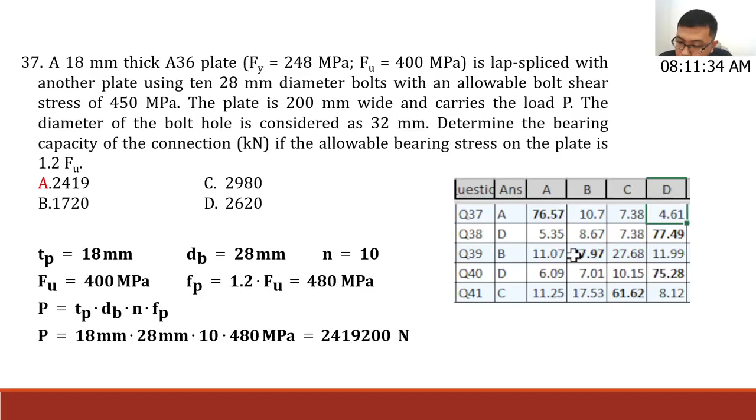Actually yung stats natin dito for the online module, if you're going to consider structural, talaga namang nag-improve. Kasi pag i-compare natin siya with what we had for this same set of questions, although iba yung given, no? So face-to-face exam, same questions, iba yung given doon, napakababa ng stats when we had that discussion, when we had that first exam for the face-to-face students. Napakababa talaga, like there's only one or two questions na may 60% above for this same set of questions. So ayan, with the practice talaga, and of course repetition, we could definitely improve our outcomes or our performance now, as what we can see here with our statistics. That's good to know, guys.

Number 38. So that's our answer there, 2419.2 kilonewtons. Okay, one moment guys, let me make some changes here.

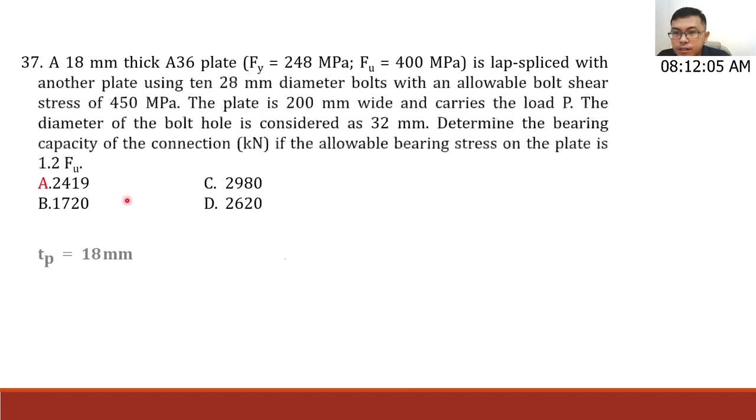Okay, so let's now consider number 38. Ito naman yung ating komento dito.

Okay, determine the balance steel ratio of a beam with beta equals 0.835. FC is equal to 30.5 and Fy equals 415 megapascal. So this is our given: Beta 0.835, FC is 30.5 megapascal and Fy is 415. Our formula for rho balanced is 0.85 FC beta 600 over Fy, times 600 plus Fy. So the answer there is 0.031 once you substitute everything.

Just substitute the given values. So the answer is 0.031. Okay, so we have no issue there.

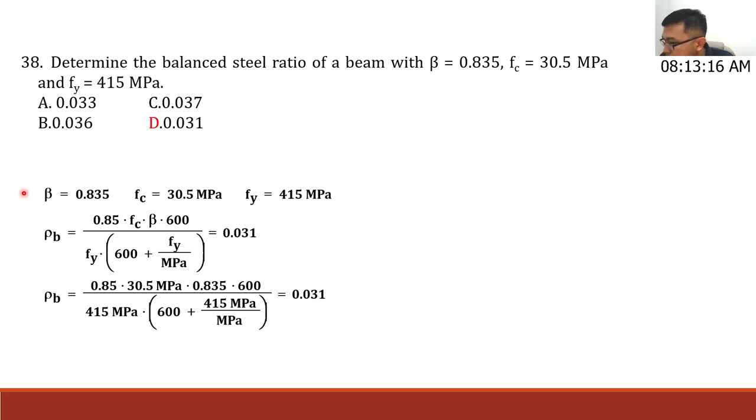That's pretty straightforward, so I'm hoping that the stats would also show the same. Let's see, number 38, we have 77.49%. Wow, that's a really good outcome for the stats as well. Although these are partial stats pa lang, guys, as what Engineer Diego Gilisania informed us. We needed to prepare for the class for today, so the partial stats of the online exam were given ahead, so we could assess the statistics.

Ayan, dito sa comment section may nagtatanong, ano daw ma-advise na matulog ng 2 tapos 4:30 AM gising. Ayan, 2.5 hours lang yung tulog, no?

Wow, napakasipag ng kaklase nyo. It's actually depending talaga sa effort, depending on the effort. And of course, pag alam natin na medyo behind tayo for a certain subject, it would be up to us to make adjustments and be able to spend more time on the problems, problem solving, or practicing. So nasa inyo na yan.

Although, one word of caution din naman for those who choose to spend their sleeping hours as study hours, I think we should not do it every day. Perhaps you could do that for some other days, but not every day, kasi ma-sacrifice din yung rest, which is very important for you. Kasi pag magkasakit tayo during the time of the review, especially approaching the board exams, yung trade-off niyan, you spend more time studying pero nagkasakit ka naman. So that would be something we wouldn't like to happen to us, especially approaching na ang board exams.

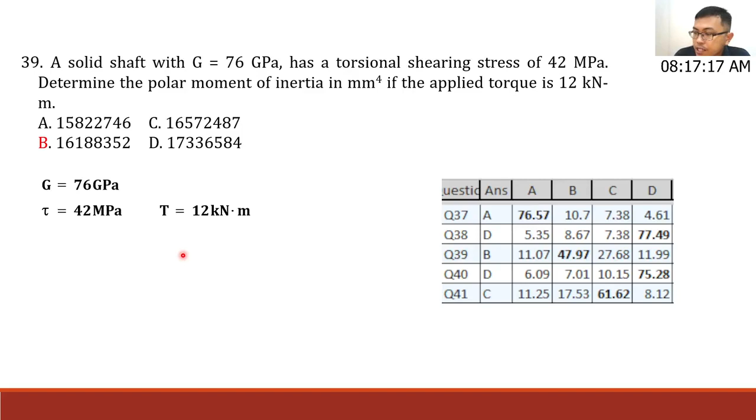May adjustments tayo dito sa the way this is solved. For those of you who have attended face-to-face, please take note of the adjustment that we made here. This formula that you see here is from the base formula natin sa torsional shearing stress, which was TR over J. Once again, please take note of the adjustment. Although if you follow the solution that we had during the face-to-face exam, that would be the way to get a value found in the choices.

However, please take note of what we just did here. So in our solution, our radius is actually in terms of the diameter. So tau is equal to T times 0.5D over pi over 32 D to the fourth.

So, if you notice this one, if we simplify that, this would actually bring you to the torsional shearing stress formula for solid circular shafts. So that was 16T over pi d cubed. It's actually 16T over pi d cubed.

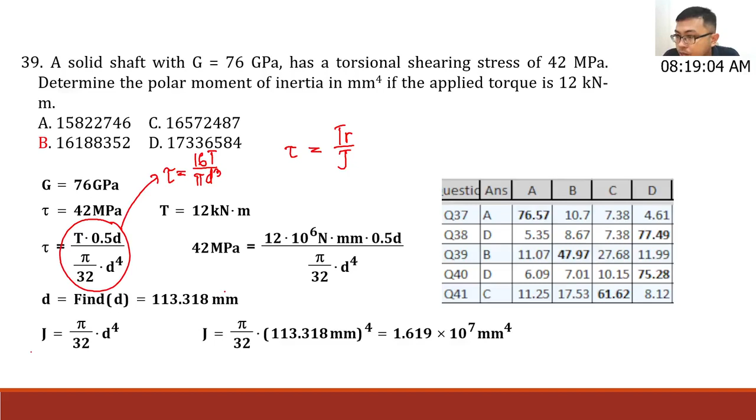Now, if you're going to do that here, substitute the value for the torque and the shear stress, so you could solve for the diameter. You could solve for the diameter. And this diameter is 113.32, which could then be used to solve for the polar moment of inertia, pi over 32 d to the 4th. And that would give us 1.619 times 10 to the 7, or letter B in our choices.

I hope that made sense to you. So the difference here compared to face-to-face is that the radius seems to become constant there, right? It's not dependent on the diameter anymore. So this is a more accurate way to solve the problem. A more accurate way to solve the problem. Because our radius here should be dependent on the diameter, as well as the polar moment of inertia, which is the unknown value in our problem.

So the solution here shows we have J equals letter B, 16188352. Now, take note of the formula for the polar moment of inertia, pi over 32 d to the fourth. That's the polar moment of inertia. The statical moment of inertia, that's pi over 64 d to the fourth. But for polar moment of inertia, that's pi over 32 d to the fourth.

What do our stats show here? Number 39 for us. So that is 47.97% got the correct answer. Alright, so let's have the next one. No questions on this particular question?

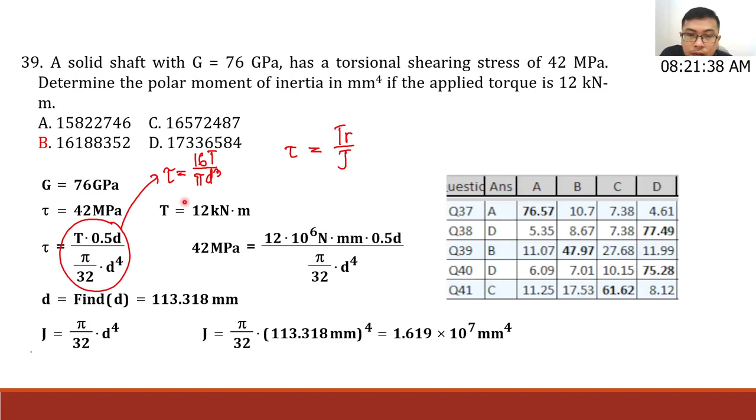Our stats here show that number 40, 75.28% got the correct answer.

Just to recall, although I didn't show it here, what is the derivation? How was BH squared over 4 derived? Let me just write it here. How was BH squared over 4 derived? So this is our cross-section.

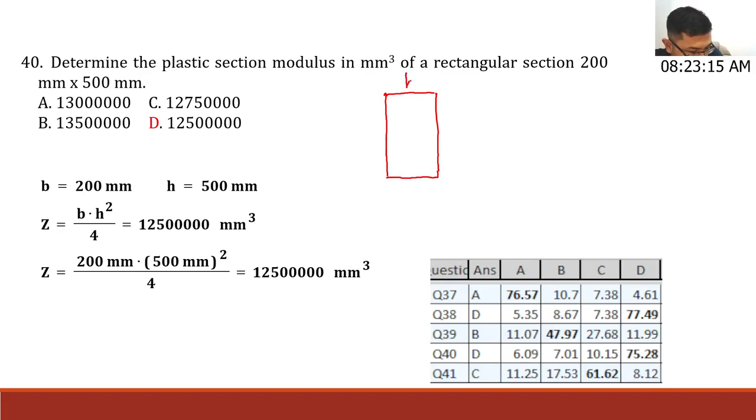This is our width, and this is our total depth H. This is what we call the plastic neutral axis. Now, what is the significance of the plastic neutral axis? The plastic neutral axis divides our section into two equal areas, two equal areas. So it's different from the elastic neutral axis. Where do we see the elastic neutral axis? That's in bending stress — bending stress of sections. For example, you have a bending stress distribution like this. The elastic neutral axis corresponds to where bending stress equals 0. That's elastic. While for the plastic neutral axis, the main principle is that it divides the area into two equal areas.

Now, how do we solve for our plastic section modulus? The plastic section modulus is the summation of the statical moments of area for both the compression and tension sides of our section. Because the stress distribution here is not like this — this is elastic.

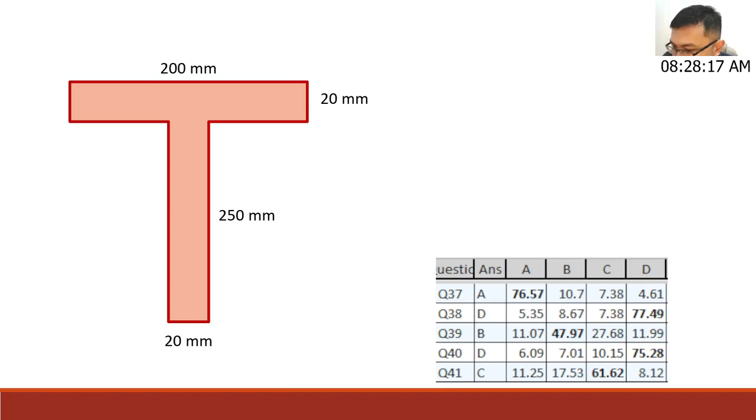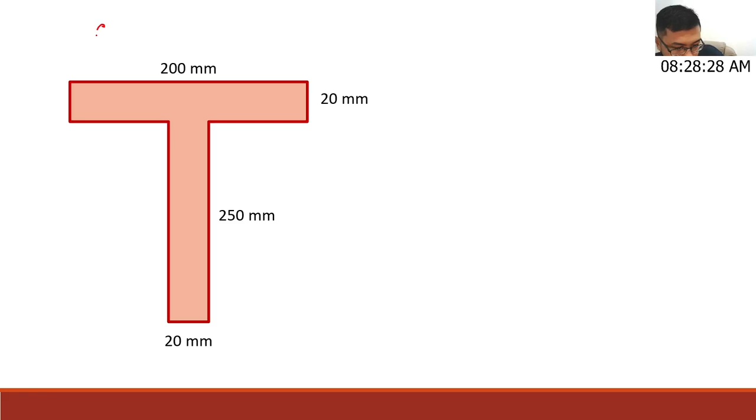Okay, so practice ta kadali, no? Practice ta gamay, guys. For our next slide, practice tayo nito. Practice. Okay, practice, guys. Compute ZX. Ito yung ating i-compute dyan, ha? Compute for the plastic section modulus with respect or along, no, with respect to the x-axis, ZX.

Sige, based on the principle that we just discussed. Principle is summation AY, summation AY, no, for both tension and compression areas. I would like you to spend a few minutes, no, and try to compute. Use your calculators there to compute for the value of ZX. And then after that, I will show you the solution as well here on our slide. Sige, kaya magsulat ko sa solution dire sa MathCAD, guys, ha? You can try it on your own first, and please let me know kung ano yung nakuha ninyong sagot.

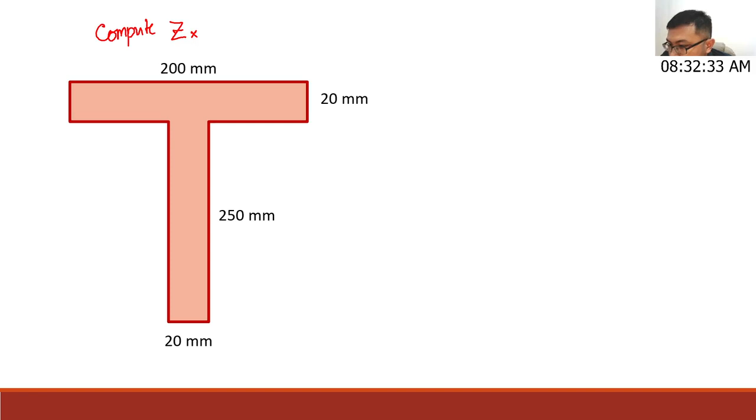Alright. Kung hindi nyo nakuha, no problem at all, no? Huwag mag-alala kasi ipapakita natin dito yung sa ating solution for the problem. Okay, sige, so I will now show you the solution to this problem, guys.

Okay, medyo maliit lang yung font dito, so let me just adjust. So gawin kong 150. Ayan.

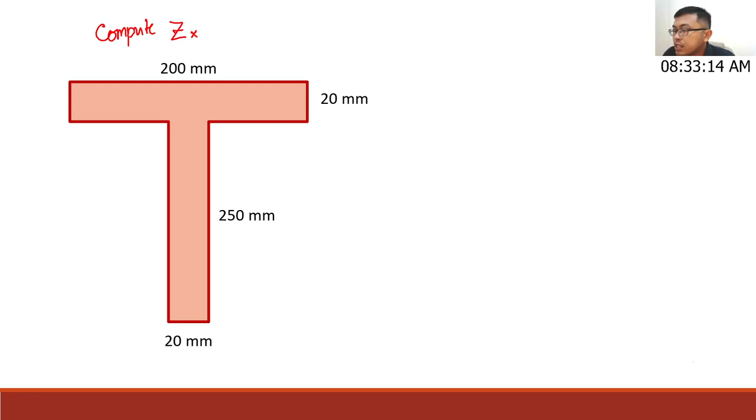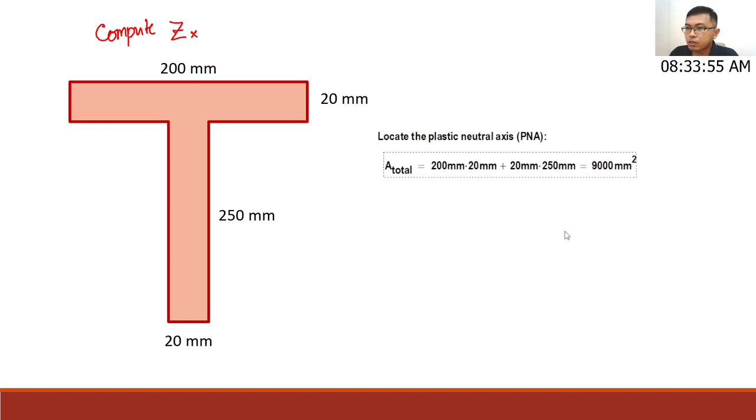Okay, sige, so basically yung first step talaga natin, okay, our first step is to locate the plastic neutral axis, also known as the PNA. Now i-locate nato siya ang location or locate the plastic neutral axis PNA. Okay, so ano yung principle when we say plastic neutral axis? It divides our section into two equal areas. Ano ba yung total area ng section na to? Ito yon, ito yung total area. So that is the area of the top flange, that's 200 by 20. Tapos yung area ng web part, no, 20 by 250. So yung total area natin is 9,000 mm squared, okay, if you're going to calculate that.

Okay, now i-locate natin yung position ng plastic neutral axis. There are two possibilities that we have to determine or we have to consider. Yung unang possibility, guys, is for the neutral axis to be located within the flange. Posible na siya, no, posible na siya, dire siya dapita, no, mana i-verify ni siya or we have to determine. Okay, and the second possibility is for the neutral axis to be located within the web area. Ano siya?

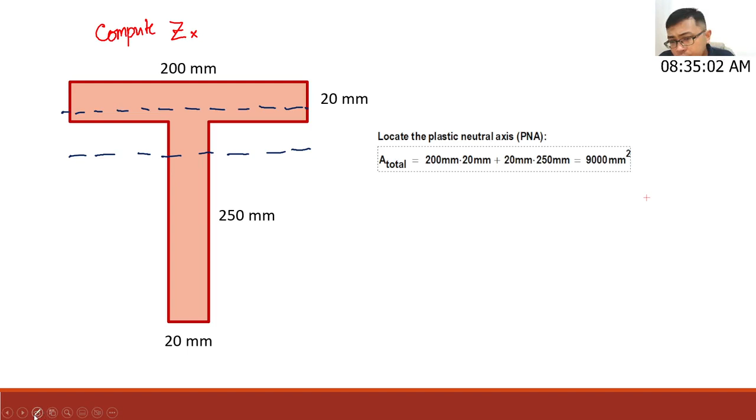Now, is this okay? We have to determine that, and for us to do so, here's what we do. Let's solve first the total area of the flange. Up here, what is the total area of the flange part? This one. So the total area of the flange part is, excuse me.

Okay, 4,000 mm squared, that's 200 by 20 mm. What is the half area of the total? The half area of the total is, how much is it? 4,500. Okay, 4,500.

So this means that the area of the flange is not enough. It's lacking to attain the half area requirement, which is 4,500. So, because the area of the flange is less than the half area, the plastic neutral axis is located below the flange. In other words, if it's below the flange, this means it's within the web area.

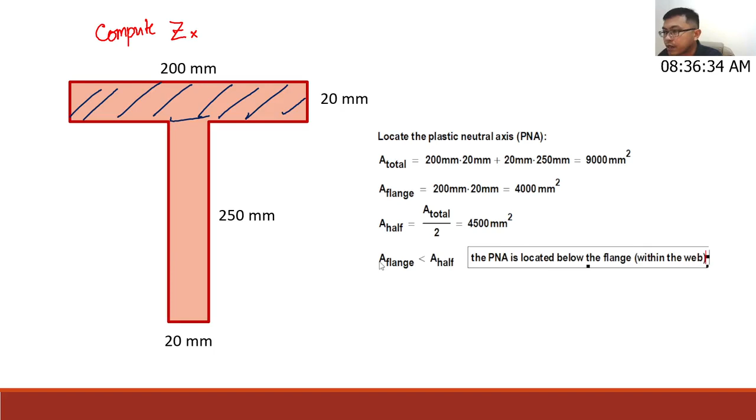Okay, so let's now determine what that distance would be. This is our y distance going to the plastic neutral axis. Let's call this distance y. So this is now our plastic neutral axis, which we have determined by calculation to be in the web area.

So to determine that, we're going to get the remaining area required to reach the half requirement. So that would be the remaining area required, equal to the half area minus the area of the flange. That would be in mm squared too. That's 4,500 minus 4,000. So, A remaining is equal to 4,500 mm squared minus 4,000 mm squared.

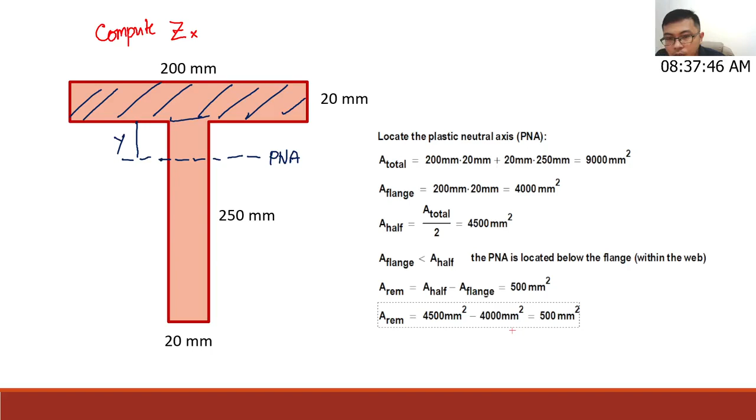And since we're now in the web area, our thickness there is 20. So our y is A remaining divided by the thickness of 20. So that is 500 mm squared divided by 20 mm. So that would be 25 mm. So this location here is actually 25 mm.

25 mm, 25 mm below the flange, 25 mm below the flange. So if you're going to determine this length down below, here it is: this is 250 minus 25, so this is now 225 mm.

Okay, good. So let's now determine our z. So what is z? Zx is equal to the statical moment of area of all the areas above. Okay, so let's call this area 1.

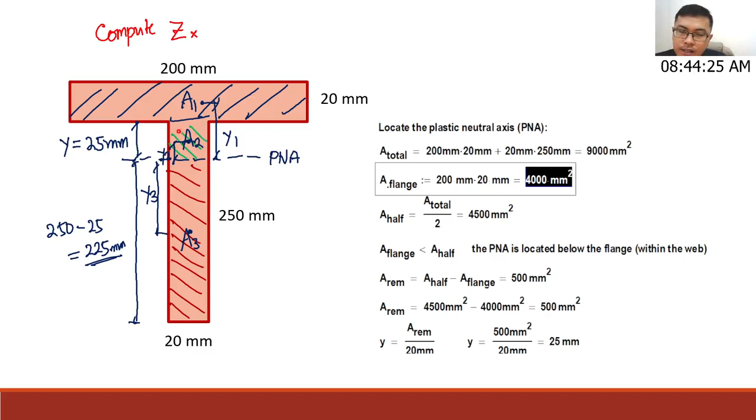Okay, so kailangan, how much area do we need here para makompleto natin yung kalahati? So ito yung ginamit ko. Parang ano lang ba? 4,500 minus 4,000. So yung half area natin na kailangan ma-achieve minus the area ng flange na 4,000. So kailangan kukuha tayo ng 500 square mm dito sa baba.

Now, the area that we need to get there, area remaining, is equal to the y distance that we would want to solve times the thickness of that web area at 20mm. So to solve for the area remaining, the y, para makompleto natin yung half area, it's 500 and then divide by the thickness of the web which is 20mm. Kaya nakuha natin yung 25. Okay? Yan.

O, solve for y ka na. Pwede na siya, no? Shift solve for y na lang. Basta kalahati ng area, no? Kalahati ng area. Pwede ka rin dito sa baba. You can actually set it by considering the reference axis dito sa lower part ng ating web, no?

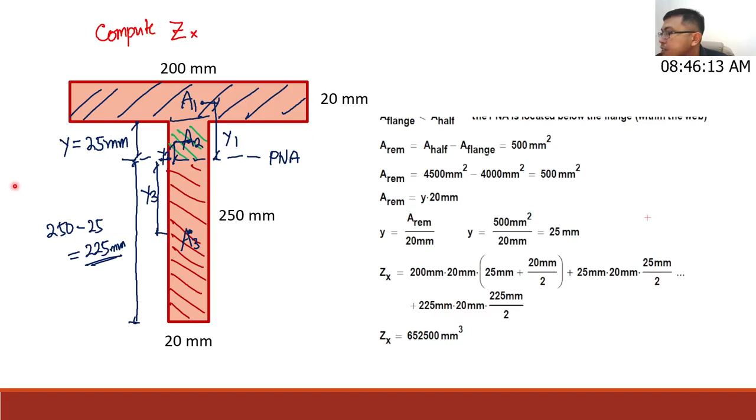Okay, so thanks guys, no, for helping sa natin, clarification. Okay na Tane? Are we good with this?

This is just additional, no? Additional lang to na topic for discussion natin kasi pwede din naman na bigyan tayo ng medyo complicated na result, no? I mean, complicated na shape. Not necessarily complicated na hindi natin siya masolve, pero complicated in such a way na hindi siya direct formula. Hindi siya BH squared over 4, no? Hindi siya... ano nga yan sa triangular BH squared over 6 ba? No? Ata. So hindi siya ganon.

So we need to know the basic principle, para kahit anong shape pa yan, masolve natin. Okay? Sir, pwede ni mode 3 to pareha sa pagkuha sa moment of inertia nga location of centroid? Moment of inertia nga location of centroid. Yes, I think you can. I think it can be done.

Linley, no? Si Linley may tanong sa Padlet. Pwede ba daw siya ma-mode 3-2? Pwede siya ma-mode 3-2 and solve for y, barred y, or barred x, no? Pwede, I think it could be done, no? Turn on frequency lang yapon dana, no, Lin? I think it could be done. Turn on frequency.

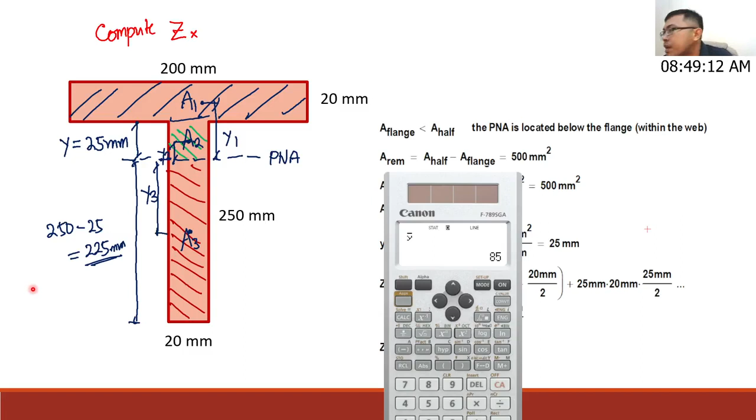Dili na din siya pwede. Hindi siya pwede, no? Kasi weighted average siya. Iba na pala, this is actually siya, no? Location of elastic neutral axis ni siya. Lid, no? So na-confuse lang ko. So the value that we get here is elastic neutral axis. So iba siya, Lid, no? Iba siya kasi yung requirement natin dito is we have to get equal areas. Alright? Kasi this is supposed to be 45, no? Okay.

So let's proceed. Thank you for those questions and suggestions, so that we can explore whether it's really possible or not.

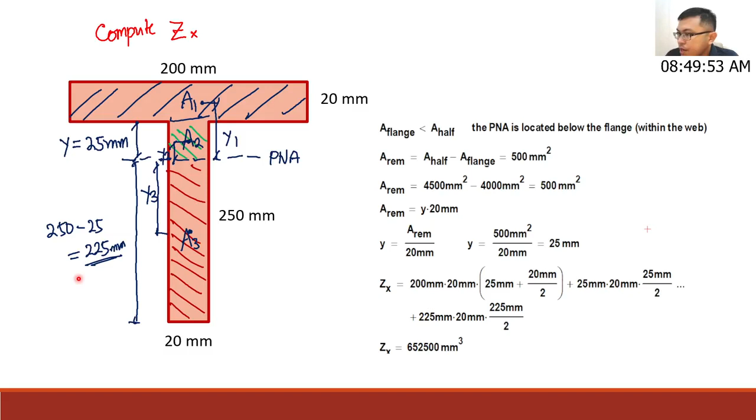I initially thought it's possible, but it was actually for the elastic neutral axis, not the plastic neutral axis. Okay, so let's proceed. I think we're done with this.

So let's move to number 41. Each of the two elastic rubber bands of the slingshot shown in the figure below has an unstretched length of 260 mm. They are pulled back to the position shown. Each rubber band has a stiffness of 80 Newton per meter. A equals 360, B equals 100. What is the pulling force?

This is our given, the dimensions for our problem. So A is 360, B is 100, LU is 260, and K is equal to 80 Newton per meter. Alright, so if you lay out the forces, angles, and dimensions provided, it will look like this.

So the length of the stretched rubber band, LS, by Pythagorean theorem, is square root of A squared plus B squared, which is 373.63. The length of stretch of our rubber band is the stretched length minus the unstretched length of 260, so 373.63 minus 260 is 113.63.

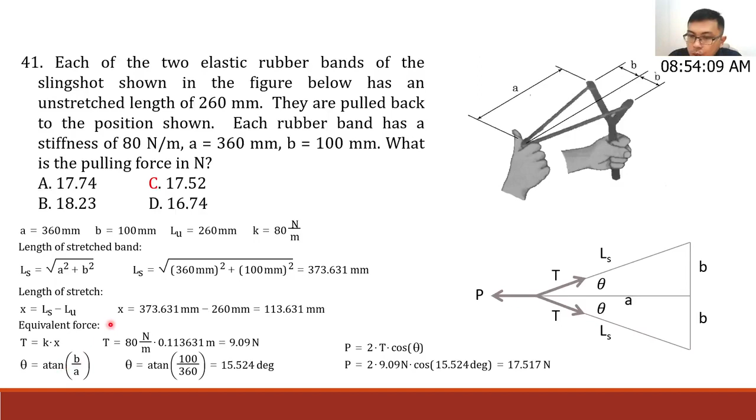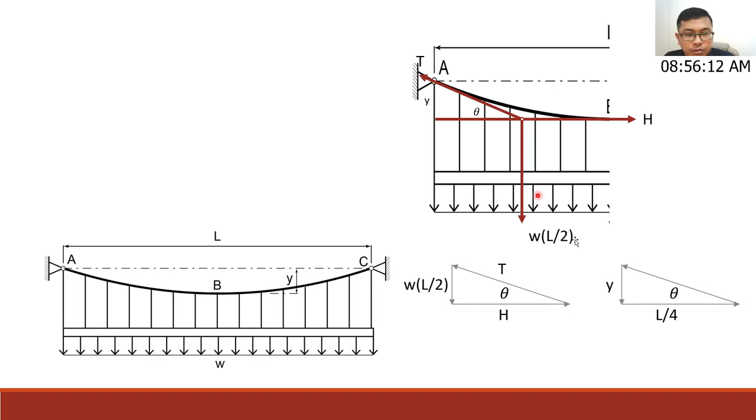Okay, so if you look at the triangles that could be formed here, this is how it goes. If you form the force polygon, given concurrent forces, our concurrent forces are the tension at the support, the uniformly distributed load resultant, and the horizontal force. So if we form them into a force polygon, this is how it looks: WL over 2 is the resultant of the vertical load, this is H here below, and we have the tension at the support at the top. So you can form this triangle.

Now another triangle you could form here is this one, formed by this part of our cable. So Y, this is theta, and this horizontal length is L over 4. It's half of our total length here, because our total length is L over 2, since we're analyzing half. So this part we use for our triangle is now L over 4.

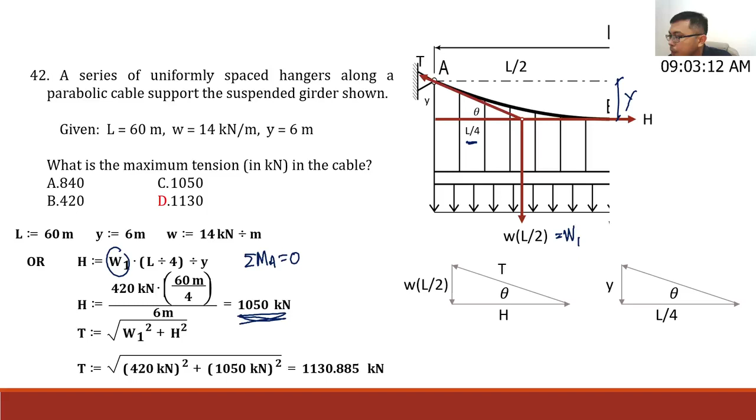Okay, so that's for number 42. Let's move on to the next problem.

So how do we solve for the maximum shear? Basically, we just get the maximum reaction. The maximum reaction here can be solved from our summation of moments. Taking moments at the right end: P times (0.5L minus 1), so 5 meters, divided by L. That's 40 times 5 over 12, which gives R1 equal to 16.67. For R2, P times (0.5L plus 1) divided by L equals 23.33.

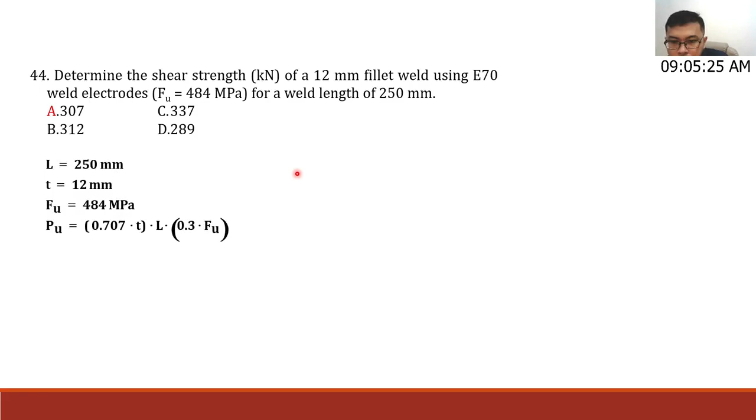Number 44: determine the shear strength of a 12 mm fillet weld using E70 weld electrodes for a weld length of 250 mm. Here is our solution: 0.707 times thickness times the length times the allowable shear stress for the weld, which is 0.3 FU.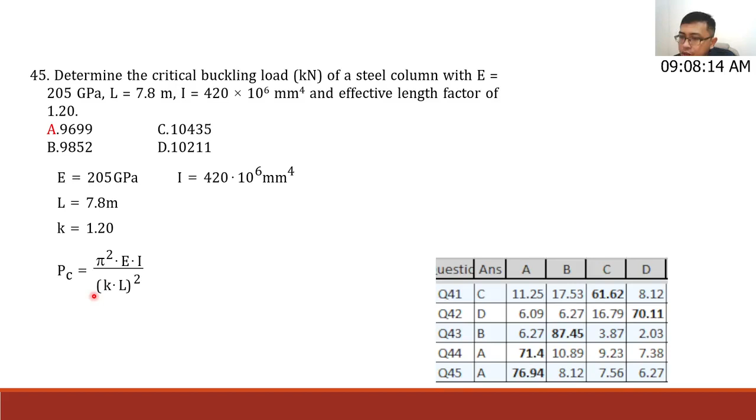We need to know this formula: pi squared EI over (KL) squared. No one will just give this to us on the board. Let's not assume all formulas will be given; there are certain formulas we really have to know, such as this Euler buckling load formula.

When we substitute our given values, our answer is 9699.541 kilonewton, letter A. For number 45, letter A also yields us a statistic of 76.94%, which is also very good. We know that when it's greater than 70 or 80%, that really means the majority got it.

So no questions on this? None, okay, so no questions. We will proceed with number... no more questions?

Number 46, 47, and 48. Let's look at the stats here: for number 46 we have 81%, for number 47, 52%, and for number 48, 59%.

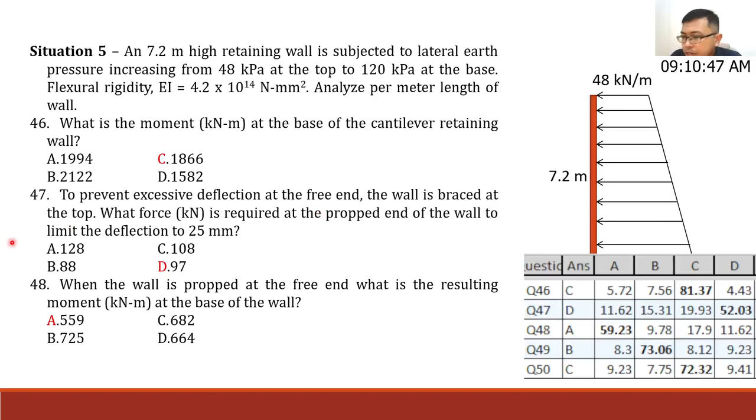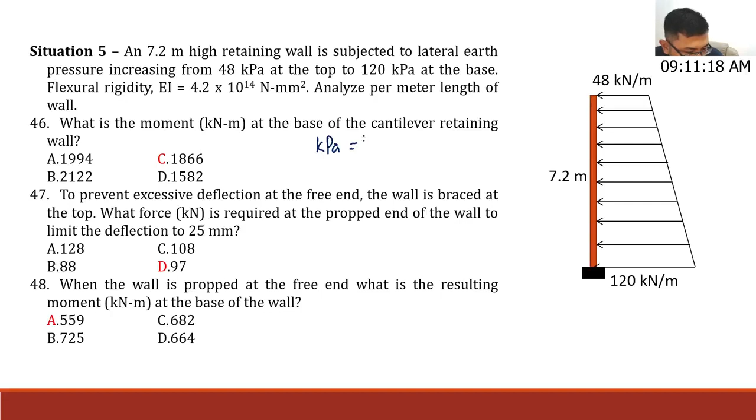Let's look at the solution. Our given here is a 7.2 meter high retaining wall subjected to lateral earth pressure, meaning we have a force here from the soil: 48 kilopascal at the top, 120 kilopascal at the base. We analyze per meter length of wall, so when we analyze per meter length, it becomes kilonewton per meter. Since kilopascal is kilonewton per meter squared, analyzing per 1 meter cancels one meter, leaving kilonewton per meter length, which is why we have it in terms of distributed load.

So for number 46, that was easy for you, 81% got this right, so no need to discuss it further.

Pero i-discuss po na to. Okay? So we could simply divide the forces into two different parts, no? Meron tayong distributed load na 48 kilonewton per meter. Meron tayong distributed load, varying load, na 72 kilonewton per meter sa dulo. So the sum of these two is 120, yung original natin dito na total width, no? Or value sa ating

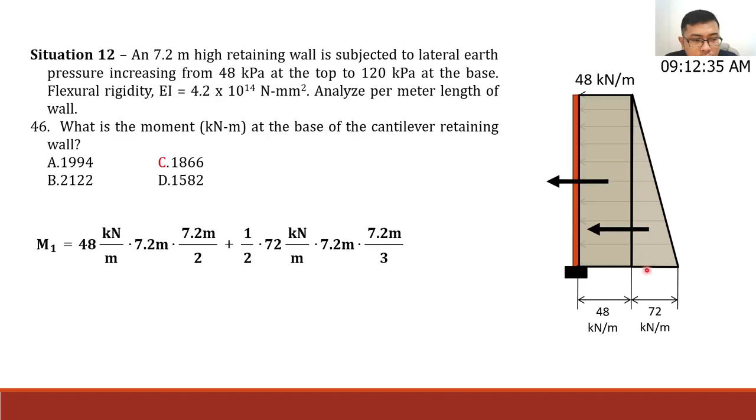distributed load. So what are we going to do here? Of course, get the first moment, no? 48 times 7.2, yung total height pala guys, 7.2. Moment arm, 7.2 over 2. Plus, para sa triangular load, 1/2 times base times height na 7.2. Moment arm from the base, 7.2 over 3. So the answer is 1866.24 kilonewton meter. Letter C from our choices.

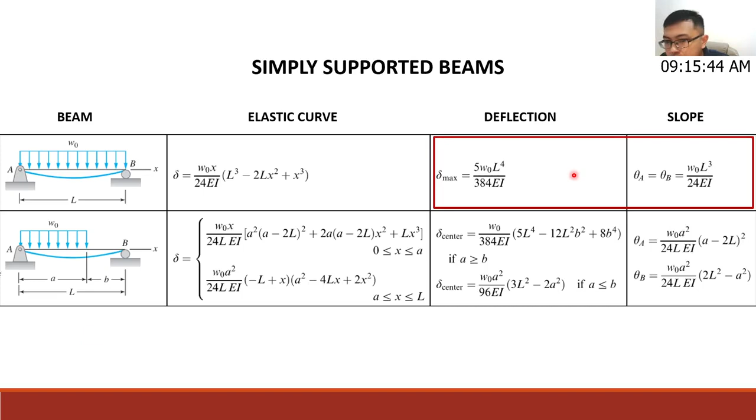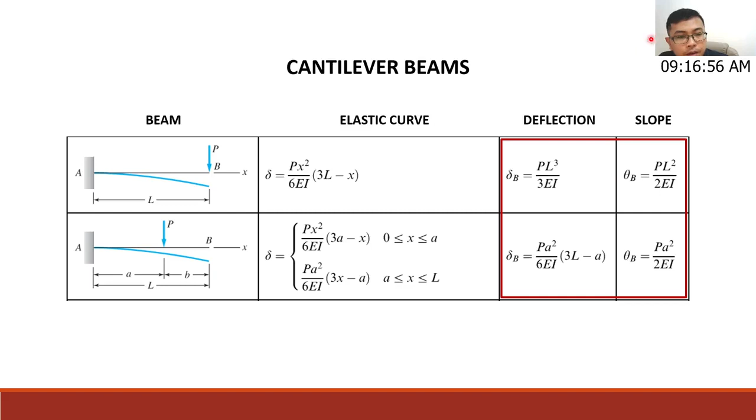So sa board exam, we cannot avoid memorizing formulas. Talagang meron yan. No? Talagang meron yan. Okay? Lalo na sa mga nag-aim na mag-top, no? Kasi sa mga mag-aim na mag-top, we want to solve problems faster para may time pa tayo makafocus sa mga problem na medyo confusing, hindi natin nakuha. So time saver talaga yung mga formulas. Alam natin na may mga nag-a-advertise na hindi na kailangan mag-memorize ng formulas, ganun. Well, pwede naman siya ma-derive. Pero magde-derive ka pa ba doon sa actual board exam? Maubos yung oras mo, no? Okay, so kung alam mo yung formulas, that's a really big advantage for you. Alright?

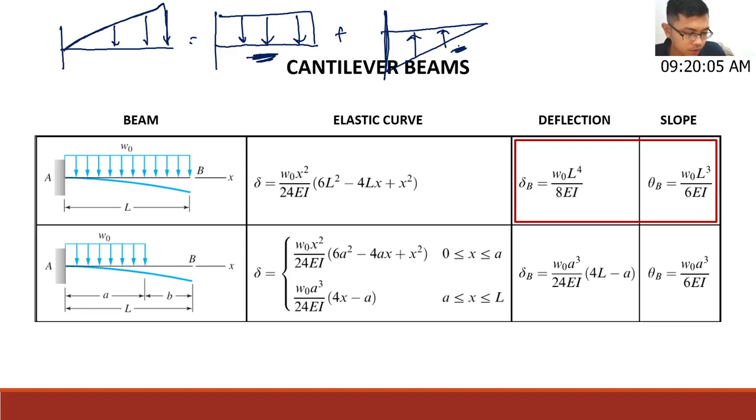Pero the simplest way, kung ganito yung type of beam natin, no? That's just equal to, sorry, let me just redraw. So that's just equal to ganito, going down. Diba, going down ni siya? Plus going up. So alam natin yung formula nito. Alam natin yung formula nito. So you can just apply superposition. Okay?

Sige. So, balikan natin yung problem. Yan yung sagot ko dyan, no? John Joshua sa Padlet. Oh, may tanong dito.

Good morning, sir. Okay ra ba sa weekly pre-board problems na lang mi mag-rely ug mga problems na i-solve, sir? Dili na mi mag-CRF? Depende talaga sa time nyo, no? Pag mag-extra time pa kayo, then I would really advise or recommend na you spend it on solving CRF4 and so on and so forth.

I don't think na by solving and resolving your modules, maubos yung time nyo for the entire day. I think you still have additional time na you could use for solving other problems. Kasi when I was preparing for the board exam, ganun din yun. Of course, focus ako sa solve ko muna yung binigay na handout, solve natin lahat. Review ko yung mga namali ko. And then after that, I still have around 3 or 4 hours to work on other problems, so that's when I open the book and solve problems again.

I know it's different from one student to another, lalo na pag medyo nag-struggle kayo na intindihin yung principle, so it would take more time for you to understand. Pero pag meron pang extra time, I would really recommend that you continue solving your CRF books, kasi mga past board yan. Although sa ating mga refresher modules, nagsosolve din tayo ng mga past board. This is past board, the one that we're solving right now, situation 12. So that's for your question, Rika, diyan sa Facebook comment natin. Alright.

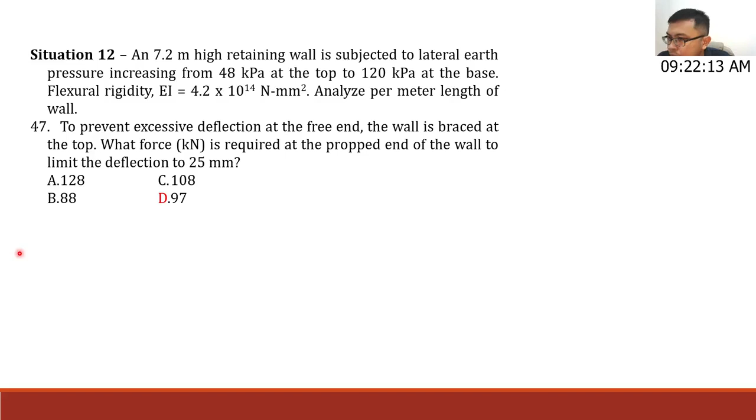So ano yung nangyari dito sa number 47? To prevent excessive deflection at the free end, the wall is braced at the top. What force is required at the prop end of the wall to limit the deflection to 25? Nilagyan siya ng prop support pero hindi siya flush at the beam level, no? Ibig sabihin hindi siya magkadikit talaga sa beam. It allows for a certain deflection of 25 mm at the free end.

Well, of course, this is also a prop support, so meron siyang reaction dyan. Tawagin natin yung reaction dyan na P, unknown. Yan yung question natin dito. What would be the force there to limit the deflection to 25 mm?

So yung loadings natin, take note. Ano yung loadings natin? Triangular loading and uniformly distributed load. Tingnan mo yung mga formulas na ginamit ko. WL to the 4th over 30 EI, that's for this load, 72 kilonewton per meter. WL to the 4th over 8 EI, that's for the uniformly distributed load, yung 48 kilonewton per meter. Yung PL cube over 3 EI, that's for the reaction at the support, equals 25 mm siya, kasi meron tayo ditong gap or limit sa deflection at 25 mm.

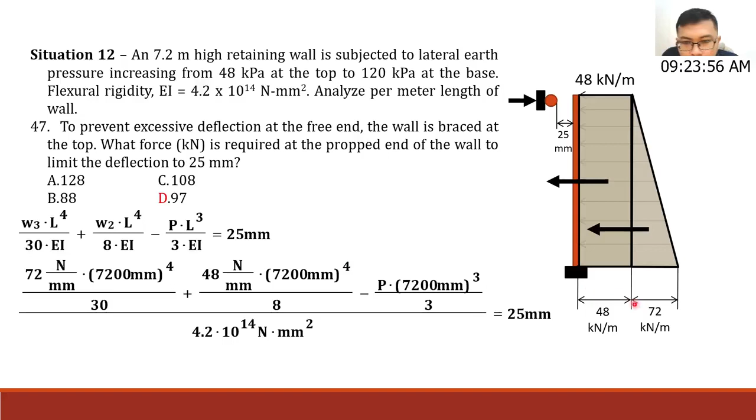I-substitute natin lahat. Ganito siya: 72 yung ating W3, yung W2 natin 48, yung ating P is unknown, doon sa kabilang side 25. Yung EI natin common, so pwede ko ilagay as a common denominator which I could transfer to the other side and then shift solve for P.

Okay, yung units na ginamit ko is Newton per mm, kasi yung kilonewton per meter, equivalent din yan sa Newton per mm if you're going to convert. Yung length natin dito is in terms of mm. Shift solve for P, you have 97045.71 newtons or 97.05 kilonewtons, letter D.

Sige, please trace the solution there and make sure you understand. Siguro from those who have taken the face-to-face or attended a face-to-face class, I also included this as a discussion.

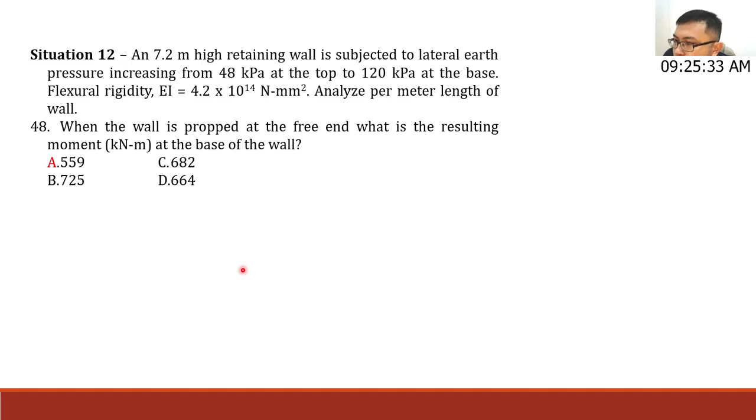Alright, sige. So if you're done, dito tayo sa number 48. When the wall is propped at the free end, what is the resulting moment at the base of the wall? So propped siya sa free end. So yung kaibahan nito, yung kanina may allowed deflection tayo na 25 mm, no?

Pero dito, we closed that, in such a way that the support really is applied at the cantilever retaining wall. So it doesn't allow any deflection at the free end. So yung change natin sa formula is this right-hand side, na instead of placing 25 mm here, I set it as 0.

Okay, I set that as 0. So pag shift solve natin, yung common denominator natin dito, magiging 0 na yan. Magiging wala na yan, cancel out na yan. Kasi pwede natin yan ilagay sa right side, EI will simply cancel out. So P is 181.44 kilonewton.

Pag i-shift solve na. Now the question is moment, no? At the base of the wall. Moment at the base of the wall.

So how do you solve for that? The moment at the base of the wall is M1 minus P times 7.2. Meron tayong P, no? Ito yung P natin guys, ito yung reaction. Lagyan ko na lang ng label dito sa taas. This is our P force. So P times 7.2, that's the total height of our wall.

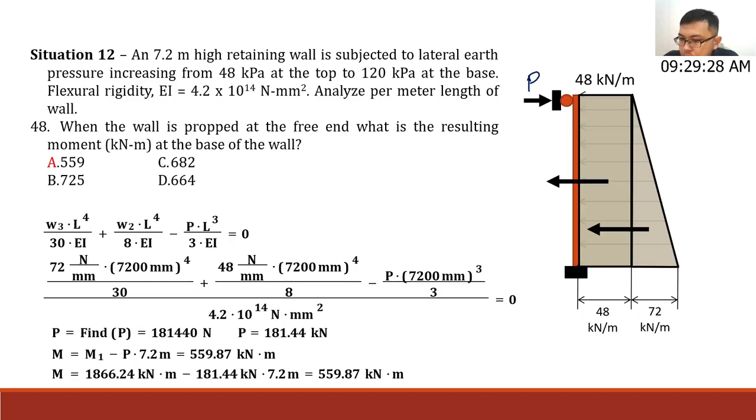So here are our questions, no? Number 49, calculate the maximum bending stress in the plank in megapascal. Calculate the maximum shearing stress in the plank. And calculate the required plank thickness to avoid failure of the wall.

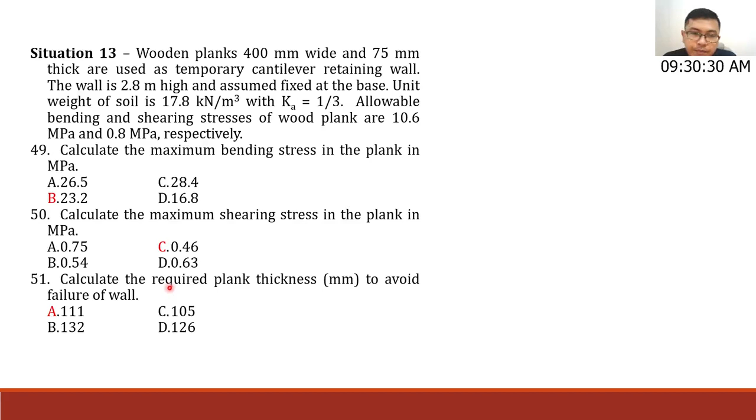So wala tayong figure for this problem. However, if we read the question properly, we could somehow visualize, no, or try to imagine what the situation is like for the structure that is being described. So we have a cantilever retaining wall made up of these wooden planks. Okay, so ito yun siya. And because we have soil being retained by the wall, we expect to have soil pressures and soil forces, no? Lateral earth loads coming from the soil that is being retained. Okay? And the resulting stress diagram of this is triangular, such as what is shown here. And we have the force applied at the distance h over 3 from the base of our retaining wall.

Okay, so let's now consider number 49 and 50. So for number 49, we have, these are the given guys, no? So meron tayong width, depth, we have the length, no, and unit weight of soil, and Ka as well. So our Fa, or the acting force, is Ka gamma S L over 2. This is pressure at centroid times area, no?

So unsa may pressure at centroid? Dito yan sa gitna, no? So if we're going to consider the centroid as this part, yung pressure natin dyan is Ka gamma S, kalahati ng buong length, no, buong length ng wall. Okay, so ito yung PCG natin. Yung area is the length times the width, L times B. Okay, so you're probably familiar with this formula: 1/2 Ka gamma S L squared B, no? Oh, this is also the direct formula for this particular case, no? 1/2 Ka gamma S L squared times B.

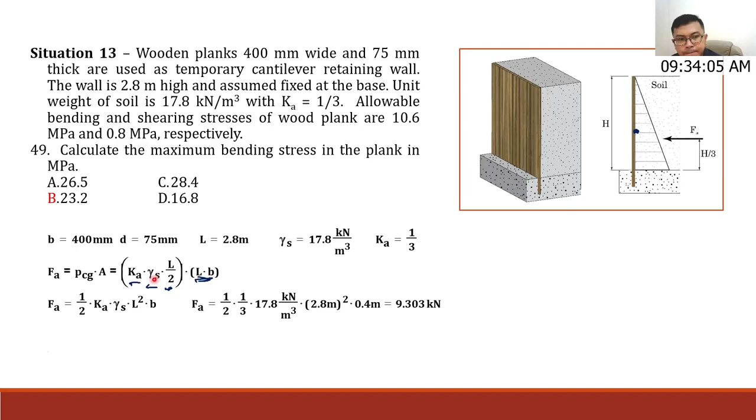Our MA, moment at A, or the maximum moment in the bending of the plank, is Fa times L over 3. Our Fa did not act on the CG — it acted on the center of pressure, CP. For a triangular distribution, the center of pressure is at distance L over 3. So with 2.8 over 3, our MA is 8.683 kilonewton-meter.

Active earth pressure, 1 minus sine theta over 1 plus sine theta — oh, that's correct. That's from geotech, right? Good that you still recall that. There's also a formula using tangent squared, guys — the tangent squared formula.

Going back to our solution, we also have the shearing stress equal to FA, that's 9.303. Then we have FB, 6M over BD squared. Maximum bending stress is what we're looking for here. Substituting, 6 times the moment, which is 8.683 times 10 to the 6 Newton-mm, over 400 times d squared, gives us 23.16 megapascal. Letter B.

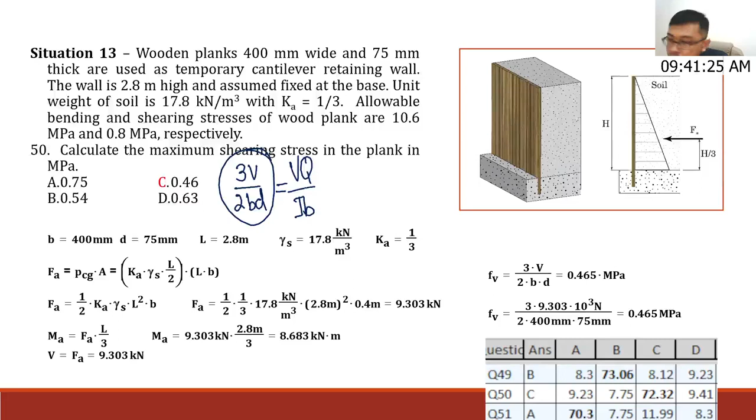Sir, why 3 over 2? That's a formula — 3V over 2A, for rectangular sections. It's 3V over 2BD, the formula for shearing stress in a rectangular section, derived from VQ over IB. We won't derive it here, but that's what it is.

Sir, what's the formula for shearing stress in a triangle? Let me double check that — but what I recall for a triangle is 3V over A.

Why sir, isn't the 2.8 meters used for D? No, because this is just like a beam — a beam with a cross-section that has loads on it. For the analysis of stresses, you use the cross-section, not the length or span. VQ over IB refers to the cross-section. You use L to get the maximum moment, but to get the stresses, you use the cross-section. It's vertical, not horizontal — these are the forces, and it will bend on its major axis.

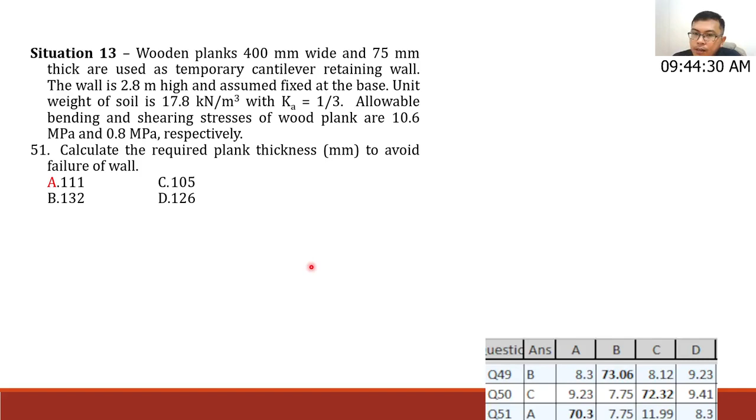So, wooden planks, this is still given, no? Number 51. Calculate the required plank thickness to avoid failure of wall. So we have here the given allowable bending stress and shearing stress is 10.6 megapascal and 0.8 megapascal respectively.

Now, these formulas are for rectangular sections. I repeat, this is for rectangular sections. Our cross-section here is clearly rectangular, having a width and having a thickness. So we could apply these formulas.

So we rearranged because what we're looking for here is depth or thickness. We were given allowable stresses. So changing our formula, rearranging it to solve for the depth, we could have 43.61 and 110. So the bigger of the two, that's what we pick, because we're designing. So the answer is 110.8. Our stress there, number 51, is 70.3 percent. Okay?

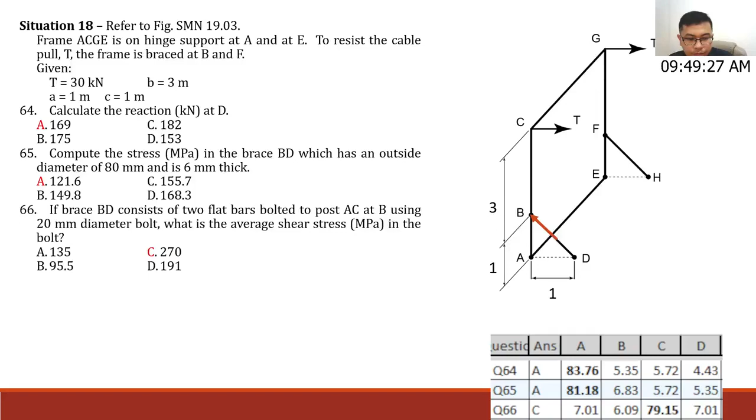So here's our figure. We're going to get the angles. The angle here for our force is 45 degrees. Let me just place it here.

Okay, the reaction at D equals the force in BD. So if you want to solve for the reaction at D, you might as well just get the summation of moment to get FBD, and RD is now equal to FBD. So once again, the principle here: when you want to get the reaction at the bottom, the reaction will just be equal to the member force. The resultant reaction, RD, will be equal to FBD. So solving for FBD will give us that reaction. That's the simple principle here.

Alright, let's proceed. Number 65. Here we are at number 65. Compute the stress in the brace BD, which has an outside diameter of 80 and 6mm thick. So for that, we just solve for the total area.

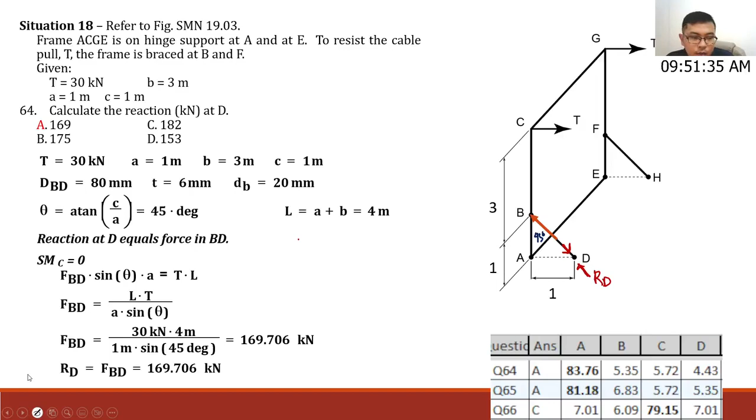Sir, good morning. Why didn't you get the resultant of X and Y? Okay, let's explain this. The resultant of Rx and Ry here is actually equal to RD. At point D, what is point D? This is your member force, FBD. Actually, we have two reactions, components RDX and RDY. So these two are equal to RD, and this is equal to FBD.

You don't need to go for RDX and RDY anymore, you can handle it directly. We do the analysis at point D. So the resultant there should be equal to FBD for equilibrium, the resultant of RDX and RDY. It's also 45 degrees. So that's it, because there's no other force acting at D aside from FBD, so they have to be equal. They are collinear and equal, the resultant of the reaction and the force at D.

Then our analysis here is considering only the vertical member AC. Point A, this is point B, this is point C. Okay, here's our force, FBD. So you don't need to analyze the entire frame, just the vertical member ABC, 1 meter here, 3 meters. That's it, we just don't want to complicate things. Is that clear?

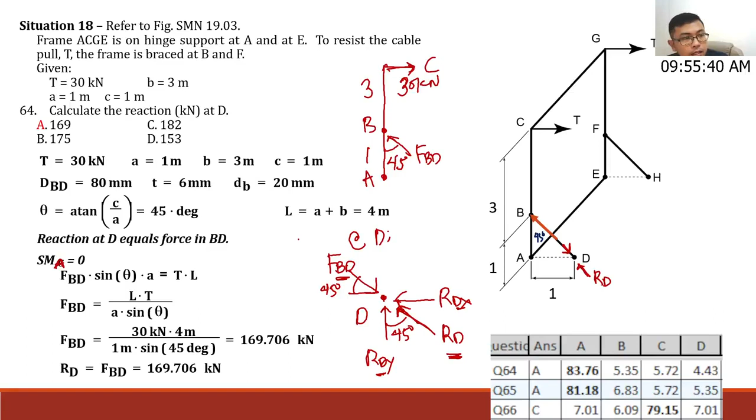So that's fine too for number 65. Stress is basically just force over area, right? So we have the force from the first question, 169706 Newtons. Let's just compute the area: pi over 4 times outside diameter squared minus inside diameter squared.

Alright, next question, number 66. The answer is 121.6, right? Letter A. Number 66: if brace BD consists of two flat bars bolted to post AC at B using a 20mm diameter bolt, what is the average shear stress in the bolt?

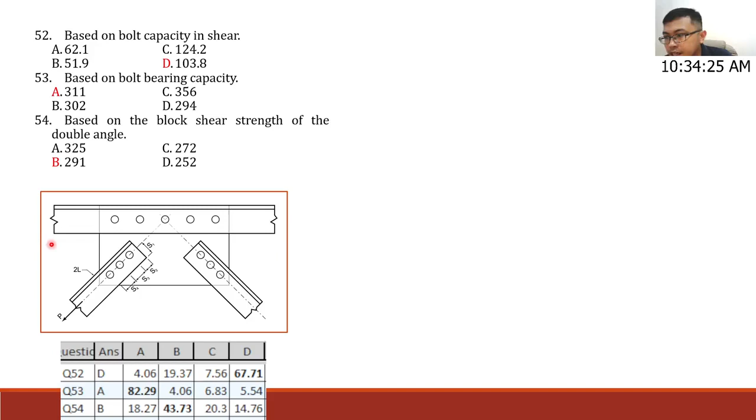So let's consider the first question, based on the bolt capacity in shear. We have here a double angle connection. If we view it in section view, we have a gusset plate in the middle, and we have the two angles here on both sides. This means that our bolts are in double shear.

So our solution is: allowable bolt shear stress times pi over 4 d squared, times 2, times 3. Times 2 for double shear, times 3 because there are 3 bolts in this connection. If we substitute the data, we will arrive at letter D for our answer for number 52, and that is 103.8 kN.

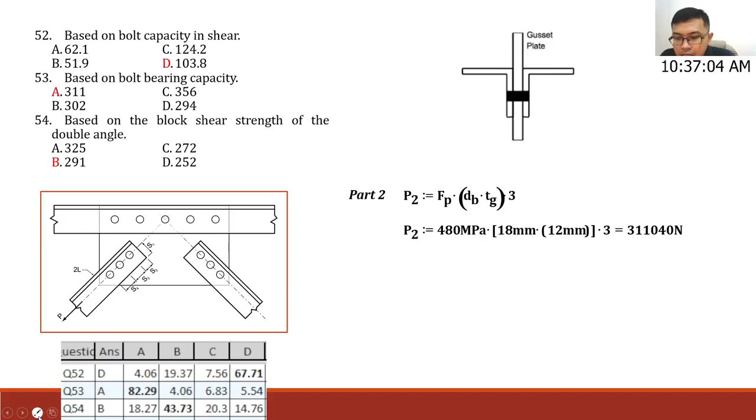As I explained in the online class, if you still recall, the thickness of our angle is 8mm on both sides, while the one in the middle is 12mm. So for the angles, 8mm and 8mm, that's a total of 16mm. If we consider the angles, the equivalent thickness would be 16, or 8mm per angle, per side of the gusset. Meanwhile, for the gusset itself, it's 12mm. This is the thinner member in the connection, so the thinner member would govern, because it will give us the least capacity when it comes to the bolt bearing. That is the reason why we are considering that for the bolt bearing capacity.

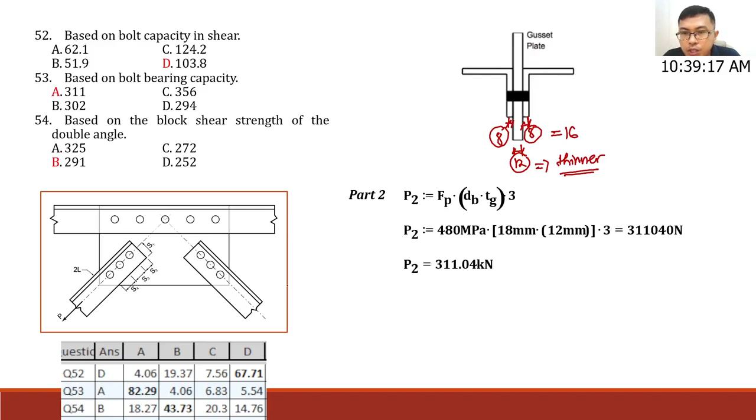Alright, so let's go to the next question, number 54, based on the block shear strength of the double angle. If there are no questions, let's proceed. For the double angle, this is our block shear. So what can we see there?

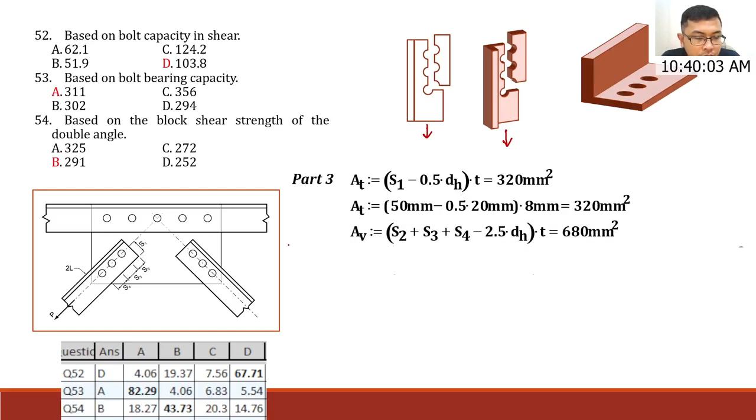This is the direction of the force, by the way. Here we also see the 3D view for the holes. So let's look at the solution for this particular pattern of block shear failure. That is the tension area—let's get the tension area. For the shear area, let's also get the shear area. So where are the tension and shear areas here?

Let's look at our figure. This is the direction of force. So all areas that are parallel to the direction of force, these are our shear areas, while the areas that are perpendicular to the direction of force, these are normal areas or tension areas. Don't forget to multiply it with their thickness, as you can see here—multiply it with the thickness.

And take note, these are net areas. So when we say net areas, don't forget to subtract the diameters of the holes that the crack passes through. So for the shear: S2 plus S3 plus S4, minus 2.5 times 1, minus 2.5—diameter of the hole times thickness.

So 680mm, 8mm—where did we get the 8mm? How did we know that is the thickness of our angle? Our description is a 90 by 90 by 8 angle. So the 8mm here refers to the thickness of our angle. That's why we have the 8mm.

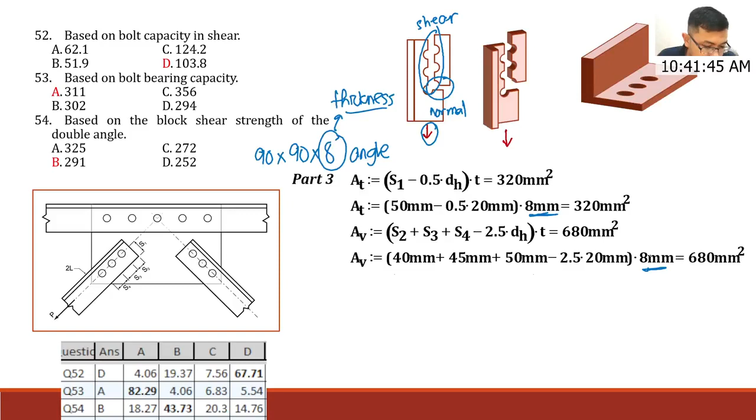So what about the tension area? Our tension area is S1 minus 0.5 DH. As you can see there, it's one half of the total diameter that will be passed through by the crack, not the whole diameter. So S1 minus 0.5 DH, don't forget to multiply with the thickness of the angle, to give us 320 mm squared.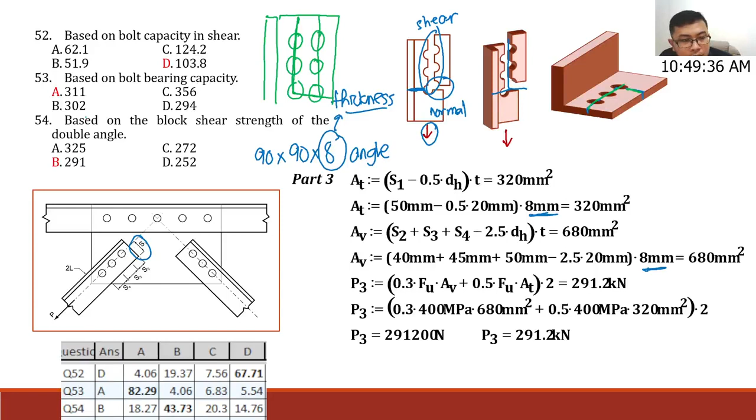This one could also apply — so it becomes multiple patterns. You can actually check this; I think there are 2 or 3 more patterns you could check. So that's how it would look. With a singular pattern, singular column, we don't need to worry too much — there's only one shear failure pattern. Alright, just an additional point to consider.

So let's now consider the next situation. Situation number 15.

A W12 by 28 is used as a crane runway girder on a simple span of 7.2 meters. The crane wheel imparts a vertical load of P equals 70 kN and a lateral load of H equals 4 kN. A standard 420 Newton per meter rail will be used. Use A36 steel, and here are the allowable stresses and properties of the section.

Number 55: Which of the following gives the maximum bending stress about the x-axis of the girder? Which of the following gives the maximum bending stress about the y-axis of the girder? And compute the maximum value of the interaction equation.

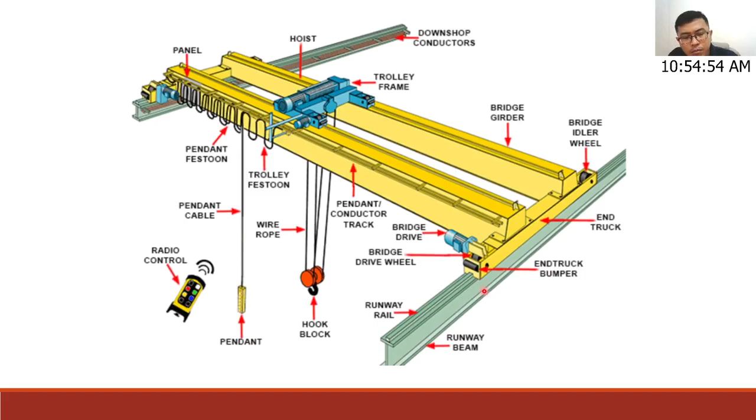Now notice this - these are two concentrated loads acting on our girder, and these concentrated loads are imparted to the girder by the wheel. That's what it says here: the crane wheel imparts a vertical load. So if we go back to the assembly, these wheels will impart that vertical and lateral load to the girder - that's why we have it here: 70 kilonewton and 4 kilonewton.

And then I place this at the top flange because the railway crane is attached most of the time on the top flange, although there are also assemblies where it's attached at the bottom flange. So that's it, alright.

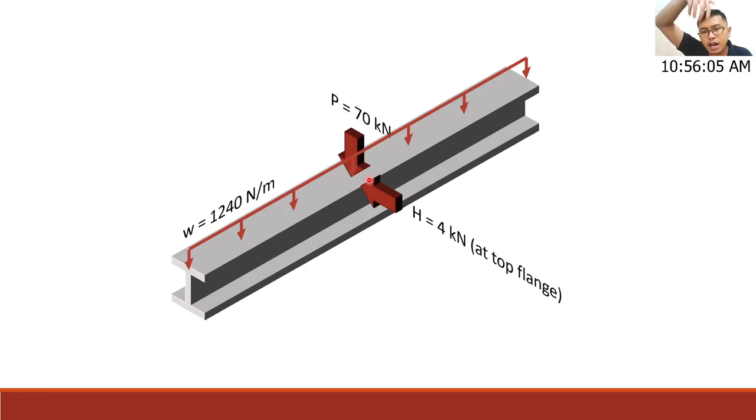Now, why did I place this somewhere in the middle of our runway girder? The reason is that concentrated loads at the midspan of a beam or girder generate the maximum bending moment on the girder. It's a concentrated load, and it's a moving load because those are wheels that pass to and fro from one point to another along the runway girder. So at the midspan is where it generates maximum bending moment for our runway girder. That's why I placed it here at the midspan.

Let's go back to the problem and look at the solution. These are all given data, guys. I have here SX and SY, the section modulus taken from the properties of the section, so that later on, when I compute the bending stress, I will use M over S — moment over the section modulus. So SX is IX over C, where C is 1/2 of the depth, while SY is IY over C, where C is 0.5 of the total flange width, or 1/2 of the flange width. This generates our two section moduli, SX and SY.

So that's what we have for our first part. I just did it one at a time. And then later we'll have another part.

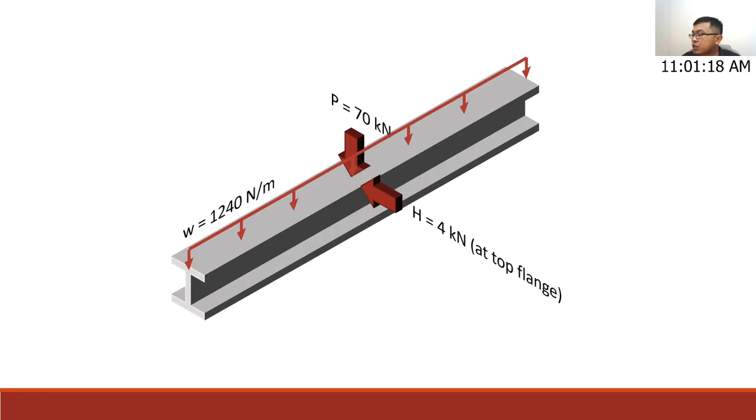For our MY, that is PL over 4. The PL here is what provides minor axis bending. This is the P that would produce minor axis bending — when you push this to the left, our member will buckle or bend, or there will be flexural stress about the minor axis. That's why we have PXL over 4.

Substituting the data, that becomes 4 times 7.2 meters divided by 4, which is 7.2 kilonewton-meter. And for our FBY, we have MY over SY over 2, which gives us 41.11 megapascal. So what we used here is SY over 2.

SY over 2 is for unsymmetrical bending with loads acting not on the centroid or shear center of our section, because our element here, a wide flange section, has the lateral or horizontal load acting on the flange — that's the location of H. When that's the case, we use SY over 2, which is 1/2 of the section modulus for the weak axis. But if the load acts at the centroid, we use the full SY, because that's symmetrical bending. But for unsymmetrical bending, with loads acting not at the shear center or centroid of the section, we use SY over 2.

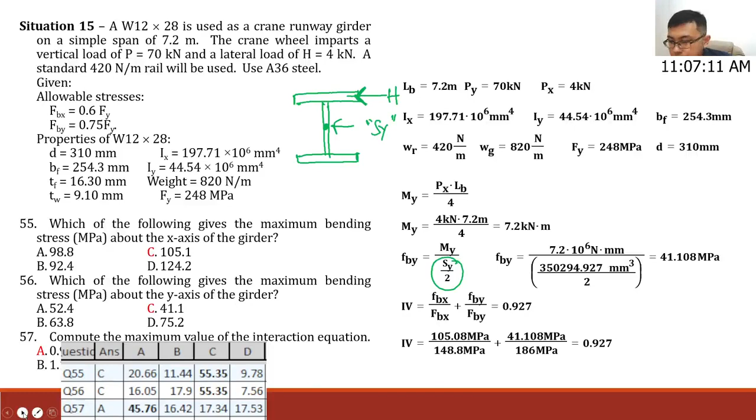So after this, we'll now have our last question or last situation, and that is situation number 16. Last 3 questions na for our discussion for today, no? And that would be for number 58, 59, and 60. Oh, di pa din sa pagyud.

Sorry. A cylindrical water tank is 4 meters in diameter and has wall thickness of 8 mm. If the maximum tensile stress in the wall is 12 megapascal, compute the internal pressure in kilopascal. Meron pa situation 17. Oh, napaka-study eh. Kala ko last na to. If the maximum tensile stress is 5, compute the depth, and if the internal pressure is 0.5, compute the bursting force.

Sige, so tingnan natin yung solution, no? I'll just show the solution here quickly. Pag sinabing maximum tensile stress in a cylindrical pressure vessel, the formula is PD over 2T. No? PD over 2T. So this is known as the tangential or circumferential or hoop stress formula. And this is the more critical of the pressures or the stresses on a cylindrical pressure vessel. Okay? So yan siya, no? Solving for the internal pressure, we rearrange the formulas and substitute the thickness, the stress, and the diameter to get 0.048 megapascal or 48 kilopascal, letter D.

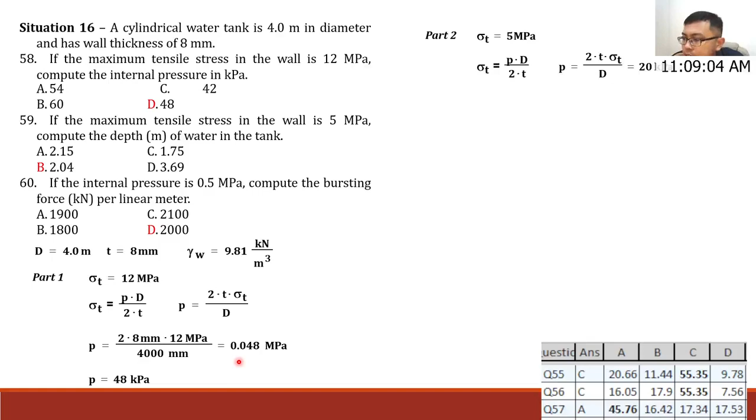For part 2, 5 megapascal yung ating sigma, no? 5 megapascal, so we have PD over 2T pa rin kasi maximum tensile stress yung binanggit sa number 59. And we're solving for the internal pressure first. 20 kilopascal yan. Pag i-substitute, labas dyan 0.02 megapascal or 20 kilopascal. Yan. And then, from that, we solve for the depth of water. So divide by unit weight of water. We have 2.039 or 2.04 meters. That's our answer. Number 59.

And number 60, no? Internal pressure is 0.5. Compute the bursting force per linear meter. That's bursting force is equal to the pressure times the diameter times 1 meter. Okay? So bali cross-section lang siya ng cylinder, no? Eto. Cross-section na to, no? So this is diameter and this is 1 meter. Bakit 1 meter? Because it is per linear meter. No? So pressure times the diameter times 1 meter.

2,000 kilonewton, letter D. Tingnan natin yung choice, yung ating stats, no? Number 58, 59, and 60. 87%, nako, almost perfect na, no? And then we have 80% and 64.02%. Yes.

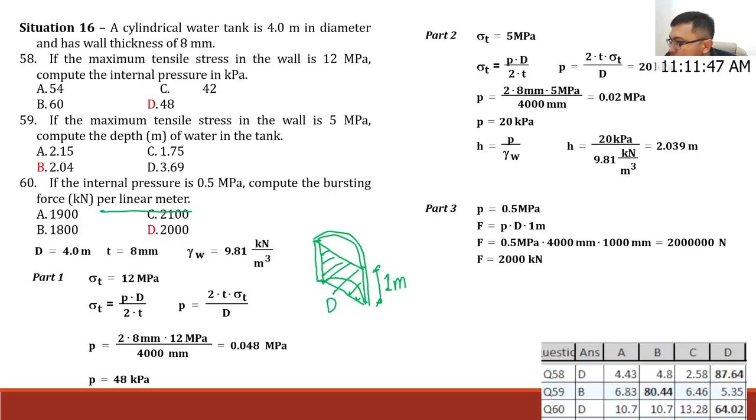Okay. So I think after this, we now have ito na talaga yung last, no? Ito na talaga yung last question natin. So that would be number 61, 62, 63. Excuse me.

So yung stats natin dito for situation 17, no? Number 61, 62, 63, 73%, 84%, and 80%. So very good stats, no? If only ganito yung stats natin sa lahat, then for sure, pasado tayo sa board exam, no? For sure, pasado tayo. Alright, sige.

So tingnan natin. This is past board exam problem. No? Rigid beam AB supports load W at B. The beam is hinged at A and supported by a steel cable CD at C. The cable is 32 mm in diameter, 3 meters long. Okay, use E equals 200. L1 is 1.8, L2 is 1.2.

W is 80. So ito yung ating weight, no? Ano daw yung vertical deflection of point B? Tapos, if the allowable stress of cable CD is 135, what is the maximum value of W? And find W if the strain of cable CD is 0.003 mm per mm.

So, for the vertical deflection of B, let's go to the solution. This is our given data. For part 1, we take summation of moment at A to get TCD.